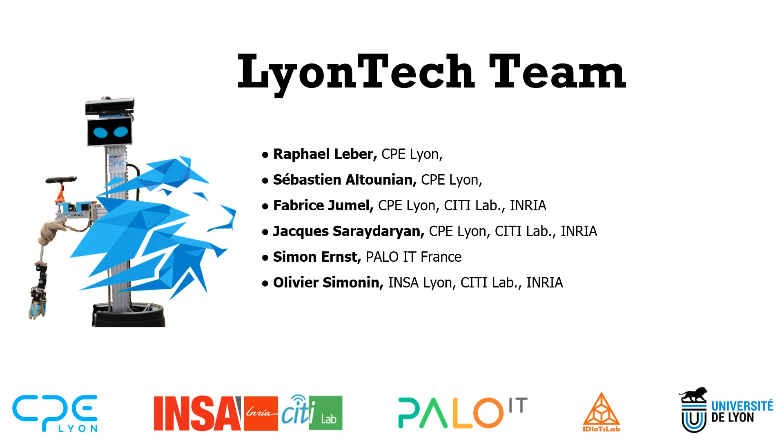After participating in SSPL and DSPL, we only candidate this year to the Open Platform League. LyonTech is composed of the engineering school CPE Lyon, its former member, but also INSA, INRIA, CITI Lab where some of us do research, Palo IT, a digital company, ID IoT Lab, a collaborative maker association, and the University of Lyon. We built our own robot based on a PAL mobile platform.

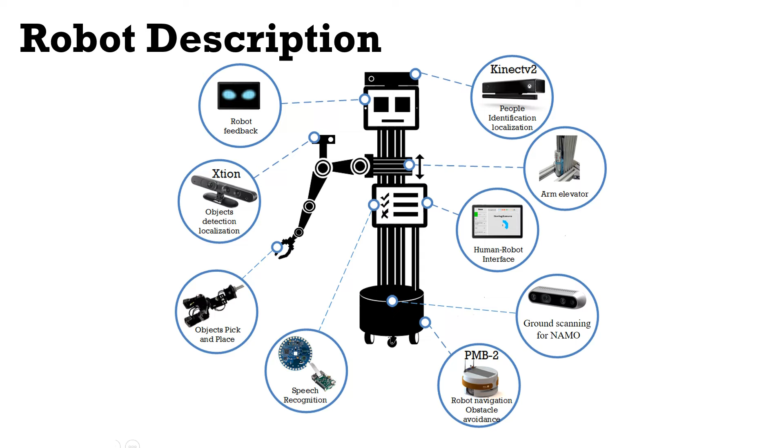We built it up with a high body holding a 7 degree of freedom custom arm, a tablet, 3D cameras, and a few other sensors. We baptized it Palbator.

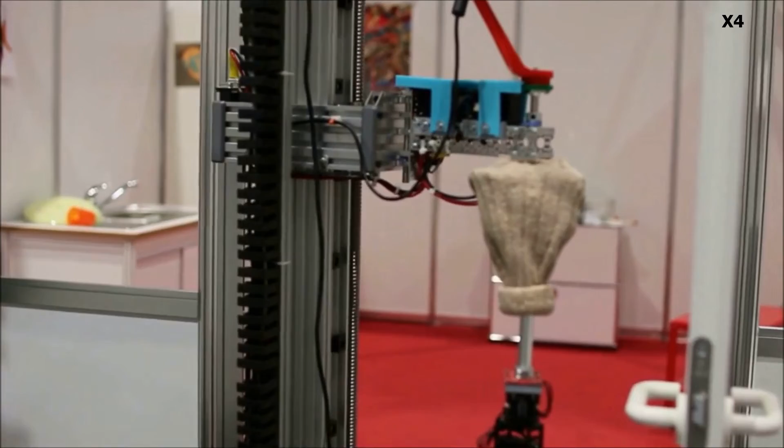Let's have a look at our robot detecting and picking objects with our custom arm. The arm has a long prismatic joint working as a lifter, followed by 6 rotary joints and a Fin Ray-inspired gripper. Thanks to a 3D camera placed in the middle of the robot arm, we detect and locate the wanted object. Then, the arm performs an inverse kinematics to grasp the object and bring it to the right person.

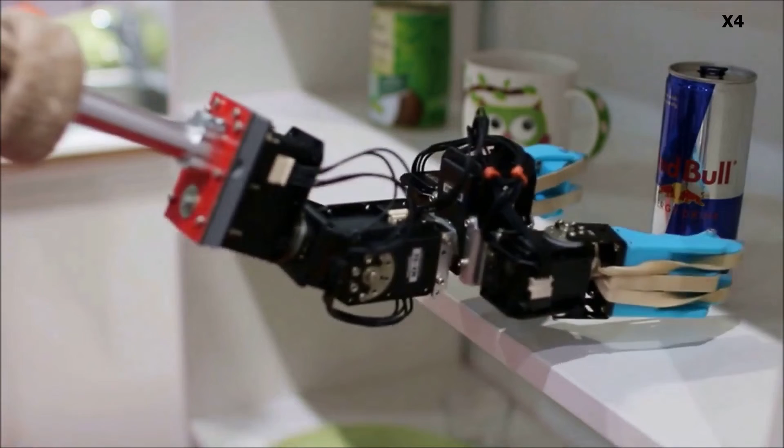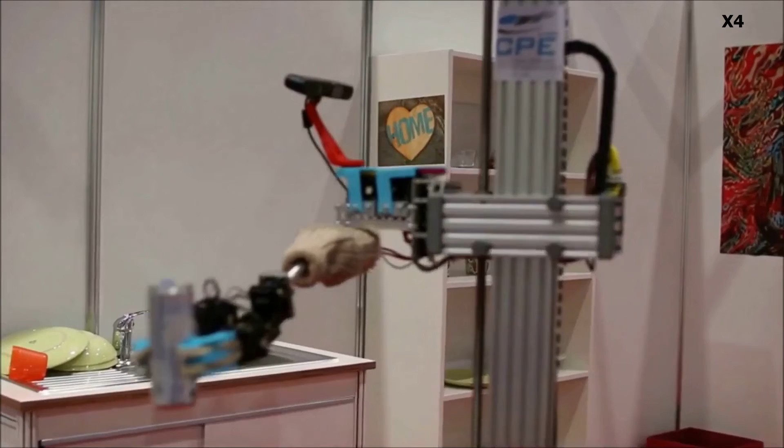Now take a glance at the Go and Get It scenario captured during the COVID edition of the RoboCup in simulation. The video will be sped up at different speeds throughout the scenario. After crossing the grasping area, the Palbator robot is moving obstacles with the NAMO feature, as it was needed in this run to reach the storing shelves.

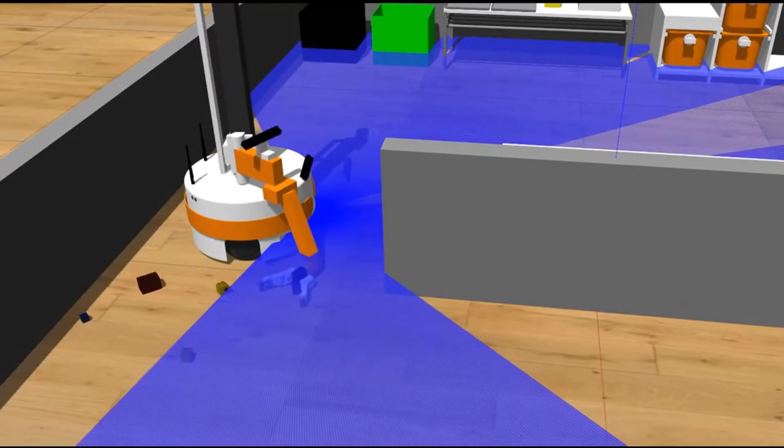Once in front of it, the robot identifies, locates, and grasps the requested object to bring it to the correct person.